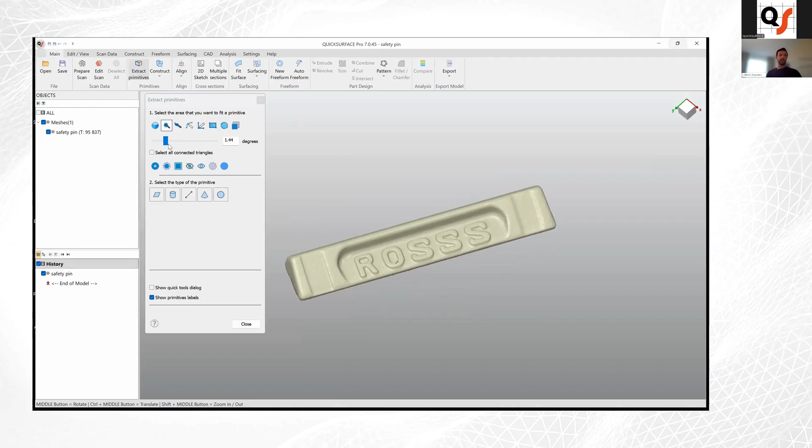We're using the segments tool, and by dragging this slider, we can change the polygon selection. I want to select the most top surface and use this as a primary plane, so I'm selecting these regions and saying I want to fit a plane.

We can take a look at the analysis. Well, this is a pretty rough part, it's casting and not a precision part. This is a safety pin for some kind of huge pallet racking system, so it's not a super precise part, and that's why we're getting these weird deviations here and there. It's not super perfect.

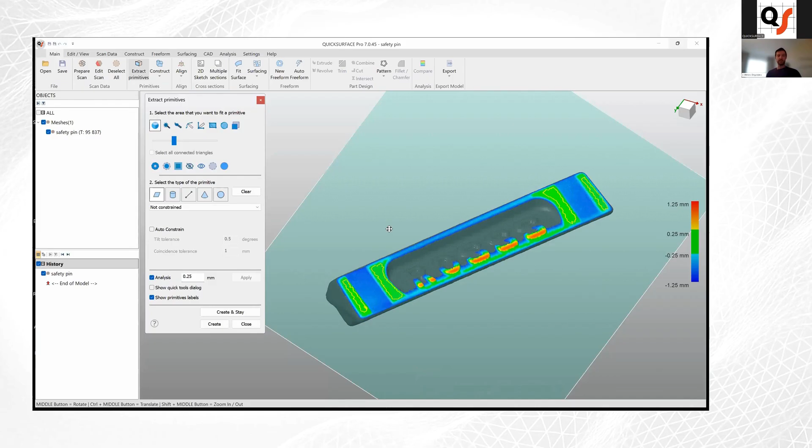I guess at this moment we can just raise the analyzer to a different deviation. Let's create our first plane, and then secondary features. I'm going to use lines from Sketch.

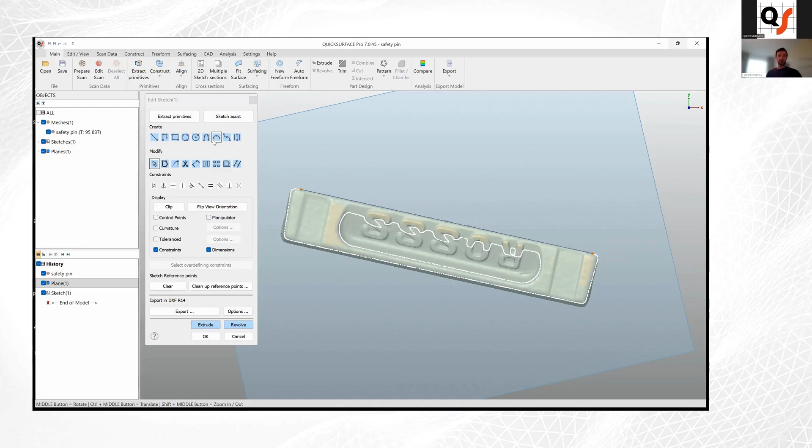In this case, I'm going to use this edge border as one of them, the front one I guess. By holding Shift, you can drag around, select these slice points, and it automatically fits your line or arc depending on what sort of point you have there.

For example, if you select this, which is obviously an arc, it will fit an arc there. So this way we can create the first line. After that, I'm going to create another line here, another line here, and from these two I'm going to extract the middle line, which will work as the x-axis.

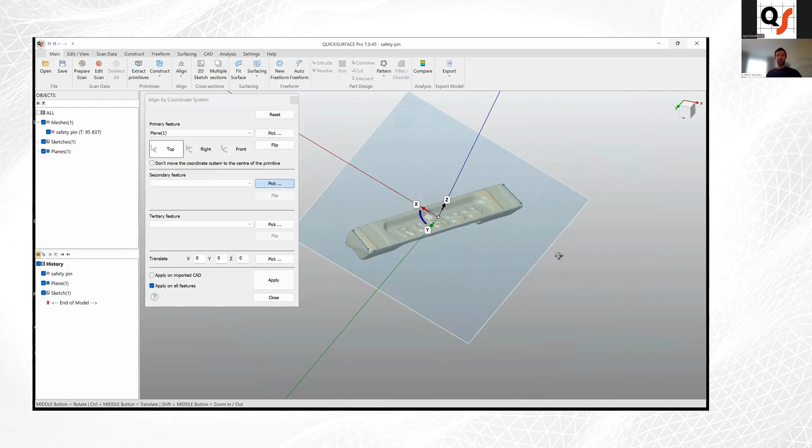Once we have several lines created, we can go to Align by Coordinate System, select the plane as the primary feature, and then I'm going to select this line, well, let's say this can be the x-axis as well, and the third line to define the center point and direction. Let's click apply. Isometric. Looks perfect.

So this is how we align such parts to the coordinate system, pretty simple and straightforward way.

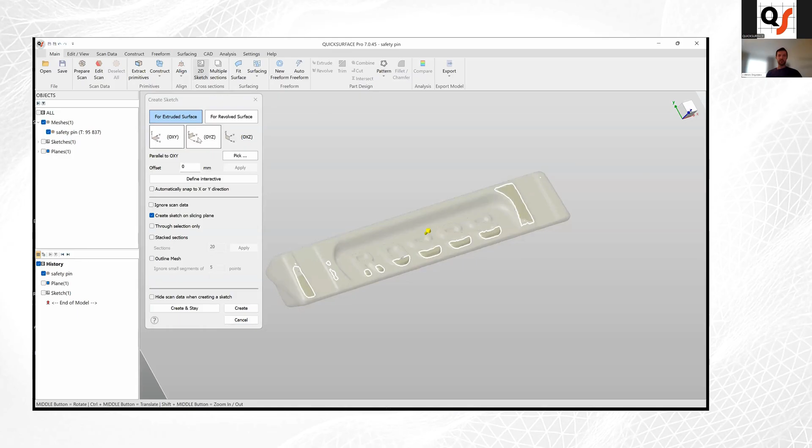After that, we can hide all of this and start extracting sketches to build our geometry. We'll go to 2D sketch. And considering this part isn't super perfect, I'm going to start with just one side of it.

During this whole reverse engineering process, I'm going to mostly stick to this side of the part, and the other side will be mirrored. So I'm going to have good deviations here, and I guess not that good on that side. So let's go.

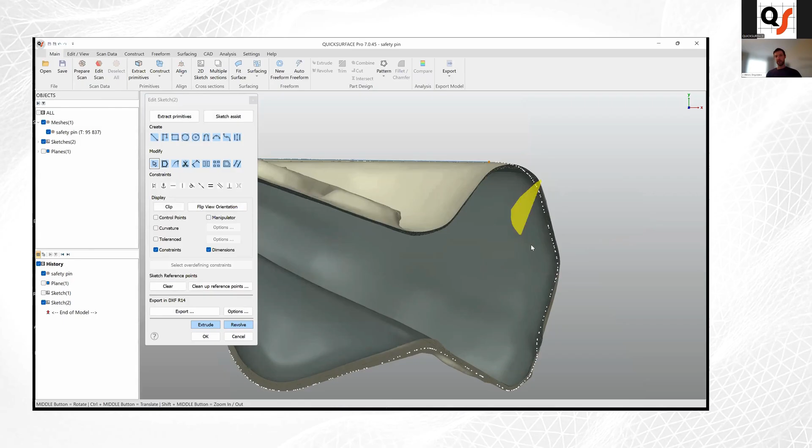Let's start with the overall outer shape. Same as previously, I'm holding Shift and selecting sketch points, now putting lines here, and here, and also like that line, and actually this one isn't that good.

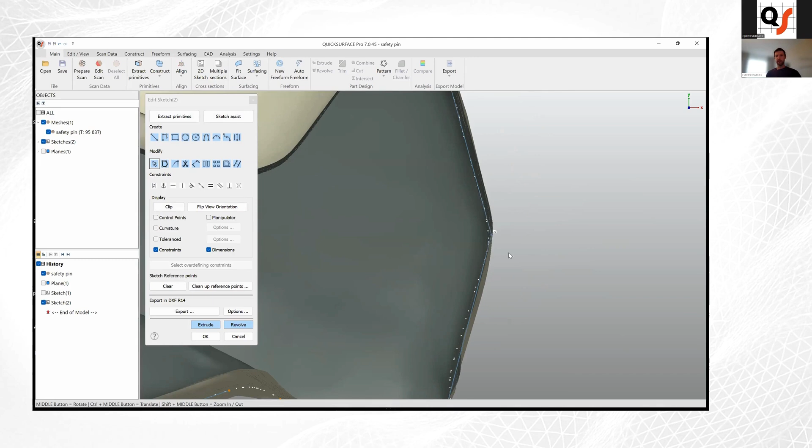So I'm going to edit manually, and by holding Control you can see a snapping icon appears. I'm going to snap to this point, and another point here. Probably I want to fit another line here. Later, by holding Control and dragging around the endpoints of our lines, the software automatically connects them.

This, like this, and the last one. Okay, so we see that it's colored right now, which means it's a fully closed shape.

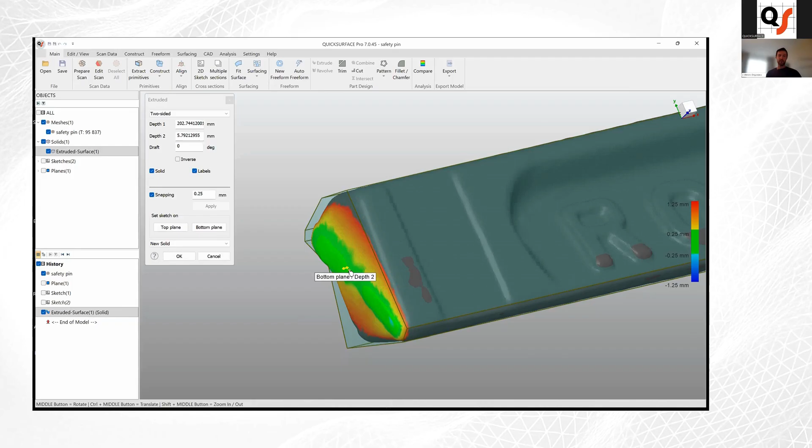So we can hit the extrude button and choose how far we want to extrude this. Typically for normal prismatic parts we use the snapping option so you can see exactly how far to extrude your solid, but in this case I'm not going to use that because we have draft surfaces here and there. So I'm just going to extend it longer than I need, and cut it away later.

Okay, so we've created the base geometry for this. We can take a look at the Analyzer. Yes, and as I said, it's not a super perfect part. As you can see here, it's matching really well, but on that side it's not that well anymore.

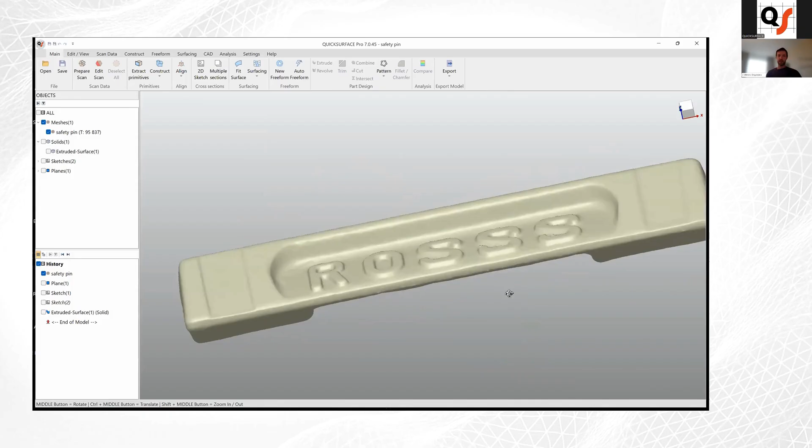And we can start to work from here. I guess in the first feature, I might, yeah, let's create this huge indent here.

Basically, we see that we have another planar surface here inside. So we're going to extract primitives again, drag our slider until we see some nice segment here that we can select. Say these, hit the plane. Okay, it will be good right now.

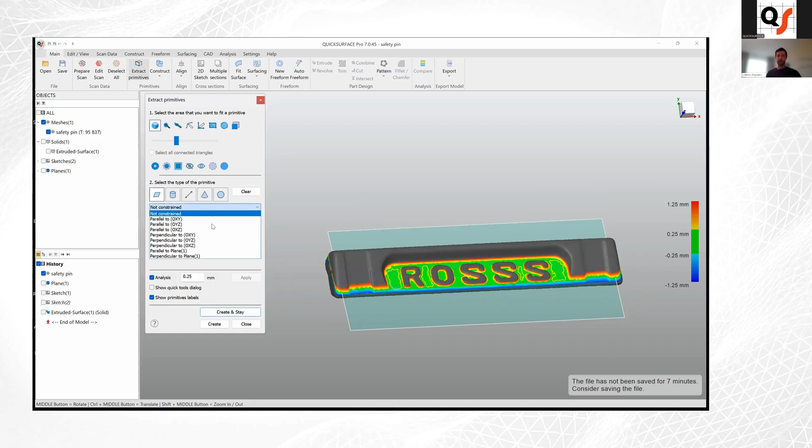But as we are creating actually like, let's say, a perfect CAD model, we want this plane to be perpendicular to the YZ plane, so it would be the same direction as the top plane we created previously. So we can come over and say we want it to be perpendicular to YZ. Okay, create. Done.

And at this point, I'm coming to create a 2D sketch. Drag it somewhere out of the fillet, for example, like this. Create. Let's get another one here.

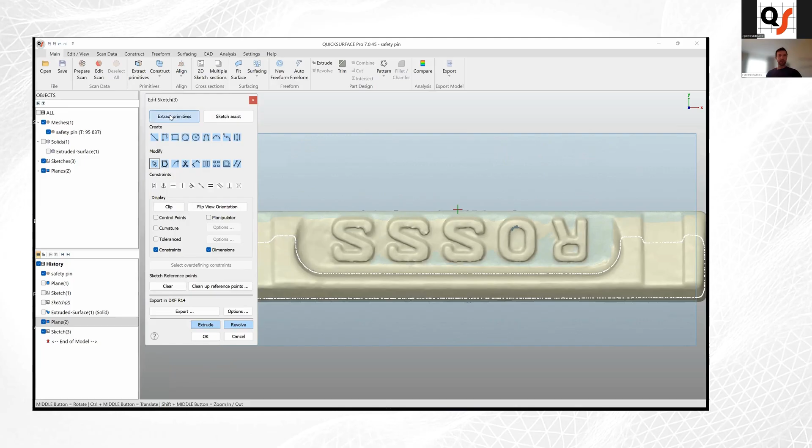Oh, well, actually, considering the geometry, we can try another approach. We can go to extract primitives. Let's select these points and say, I want to fit a slot. Not perfect, but might be a good base to start from. Make it like this.

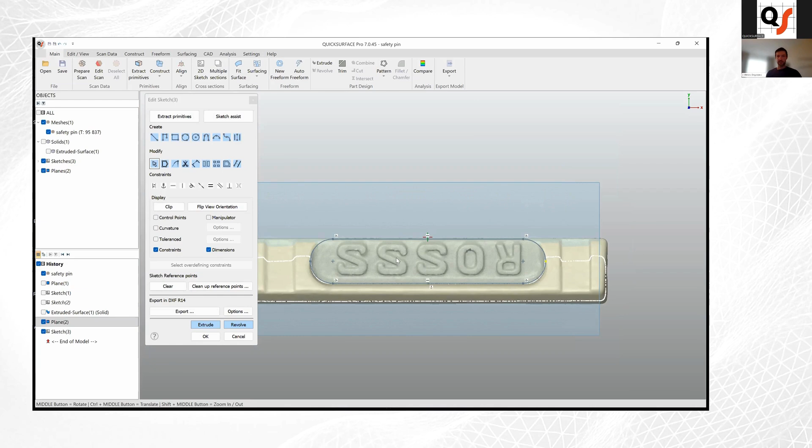Probably something like this might work pretty good. And actually, let's align it better, a bit smaller. Yeah, this looks better. So like this. And of course, we need to make it bigger to complete the cutout.

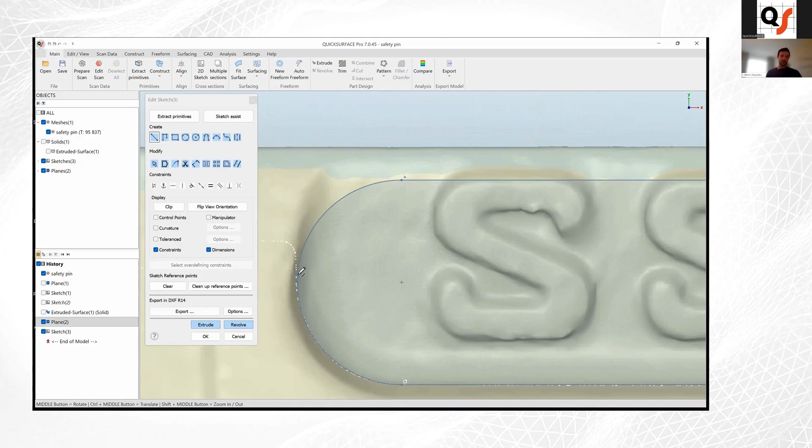So we come over to line. Now start to put it here. Let's look at the centers of our points. Let's add dimension for this. Let's say one, for example. So now we can come over to him.

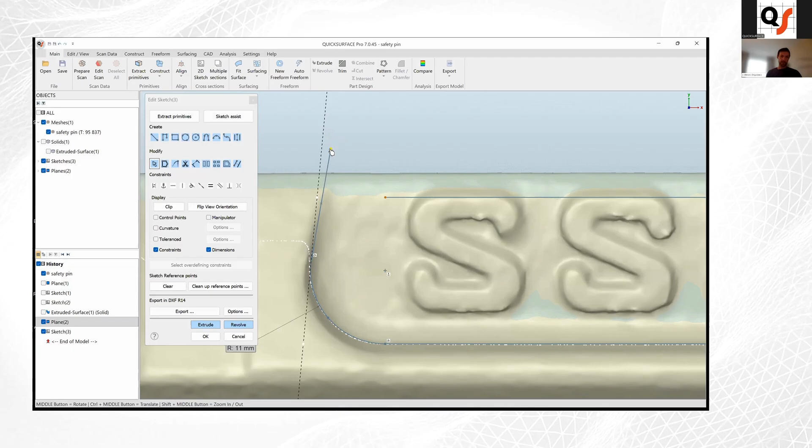And this one, at this point, we can tell this is tangent. And we can actually change some direction of it. In this case, I'm just going to eyeball this direction, and later we'll take a look at the deviation analysis, what result we actually have there.

So let's create the axis for mirroring, like this line. Let's create it there, but from the midpoint of this line. So select the mirror line, select the line that you want to mirror. Click mirror.

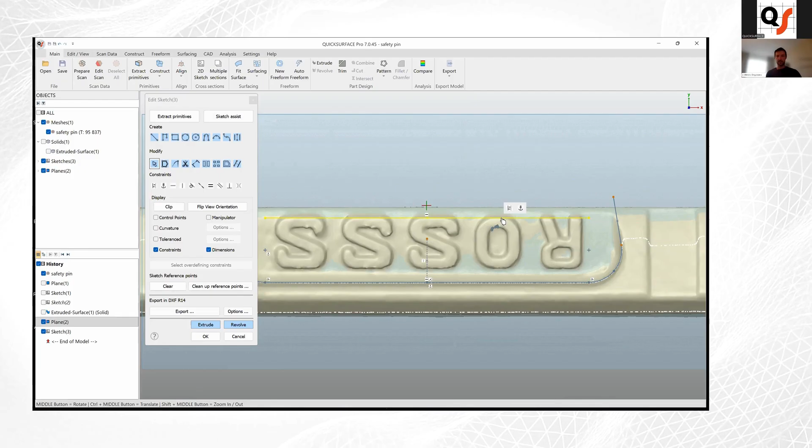Here, delete this one, we don't need that. So let's close our profile like this. Now we can see the color change, so it means it's a completely closed profile. We'll hit extrude.

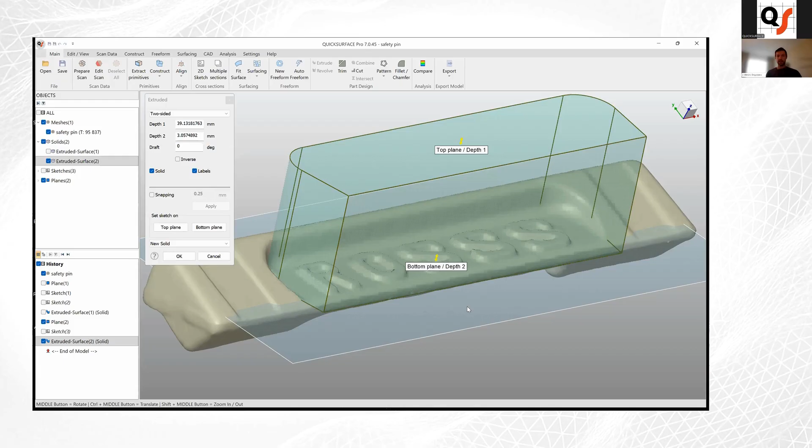Here we can actually, we have two options. We can make it a longer extrusion and later cut with this plane, or by holding Control we can snap to this plane, so you can see right now it's snapped. This will create the perfect plane that we fitted. But at this point, we see that this indent actually has some draft.

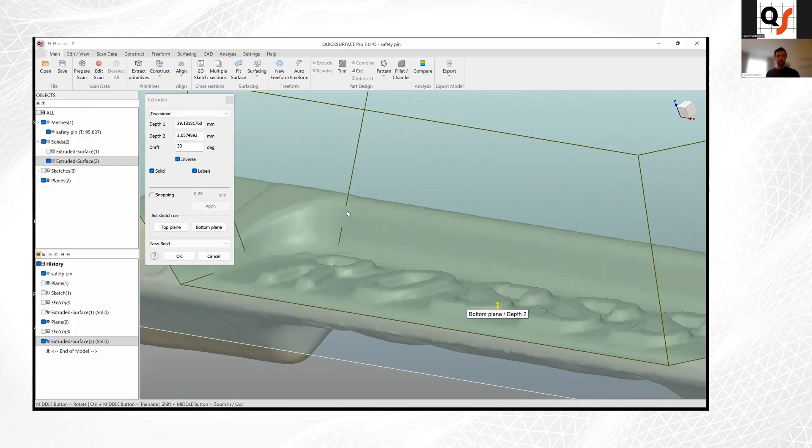Currently, we can create this as a new solid. Let's hide this plane and we can come over to compare tool and see that we actually have really good deviation in this draft surface. Same as on this side, so basically my eyeball lines were quite good.

But if they wouldn't be, you can always easily come back to your sketch, click edit, and change the direction of them to align them better.

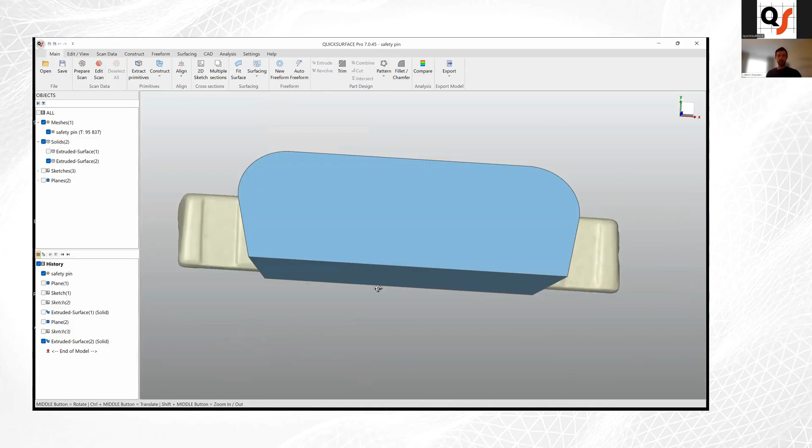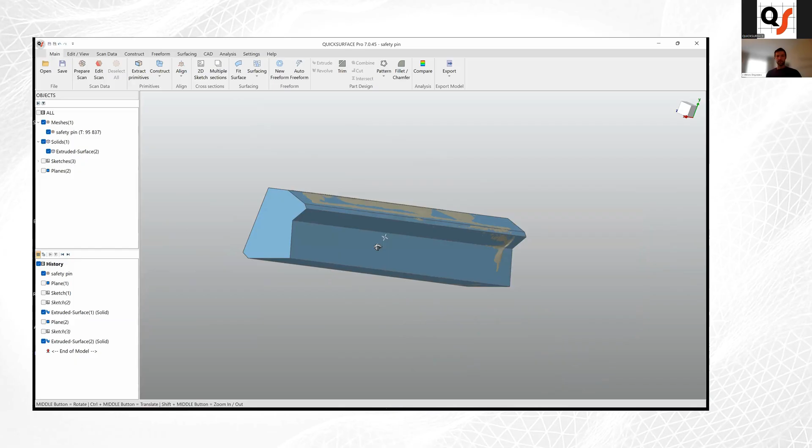So this is about this side, and probably we can add some fillets all around our part. Let's use the tolerance option. As I said, I'm going to focus on this side of the part. Looks like something 3.5 millimeters.

Okay, create and stay. Let's come over to the next one. This might be like 1.5 millimeters. Create and stay.

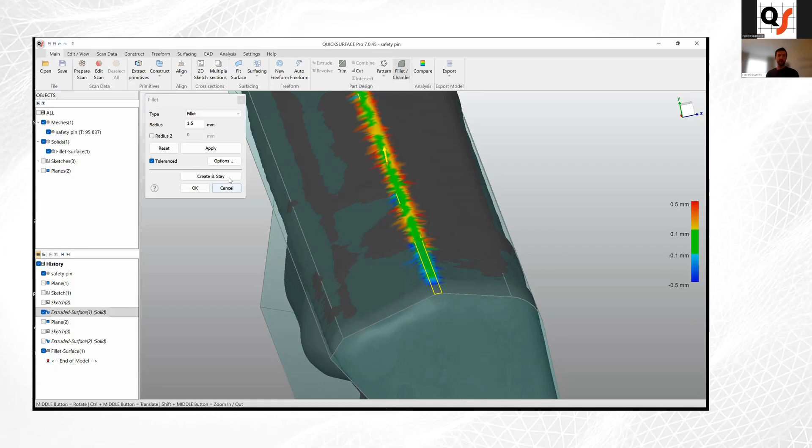Let's say this one 4.5 millimeters. So this way, one by one, you can add all your fillets with some nice deviation analysis feedback. Super simple and cool way, because you don't have to make your fillet and go to the compare tool and see if you've actually nailed it or not. So you see this instantly.

And one more here. Looks like something around 1 millimeter.

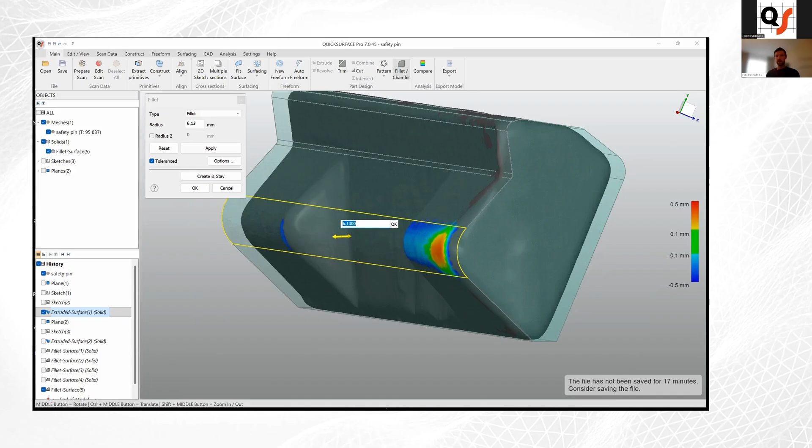Six. The next one. Two. The last one. 3.5.

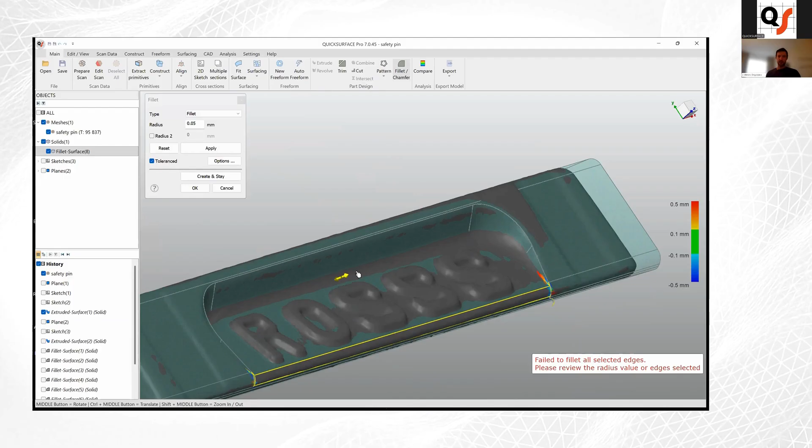Okay, so we have created fillets for the main body. After that, we can probably create these fillets right now. Hopefully, like this, and let's get rid of the very last one. Let's start to fillet on this side.

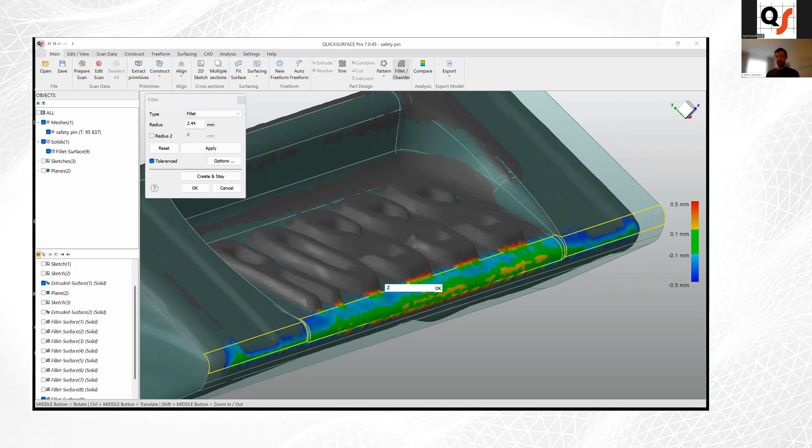And at this moment, we need to create this cutout right here. So let's create another sketch.

As you can see, the surface is pretty uneven. So let's try to find something. Maybe this position looks quite good to me. So let's create it there. Let's enable clipping.

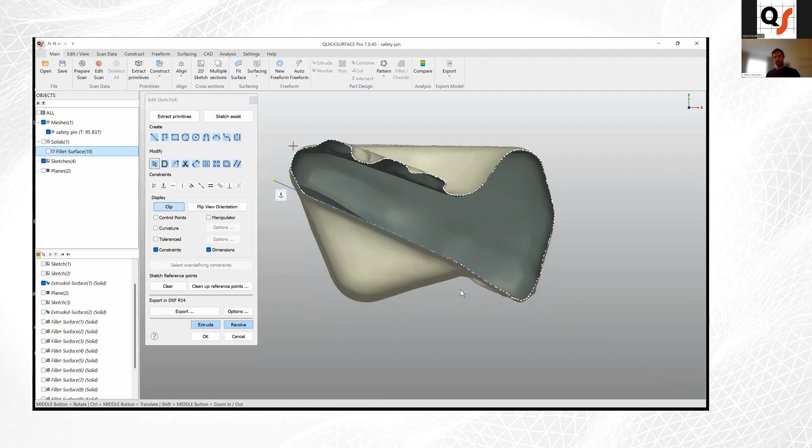Again, selecting the polygons, not polygons, but slice points. And on this side, actually have to align this edge to the actual edge of our solid, which is this one. Let's add a line over here, and then holding control, let's connect them.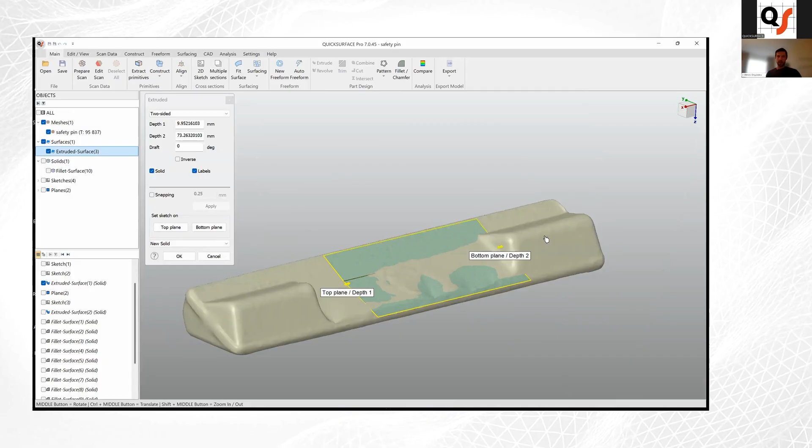Something like this. Yes, hit extrude. Make it longer.

Actually, it might be easier for us to create this as a cutting tool. So let's go back to our sketch. Let's make a complete profile out of it. Something like this.

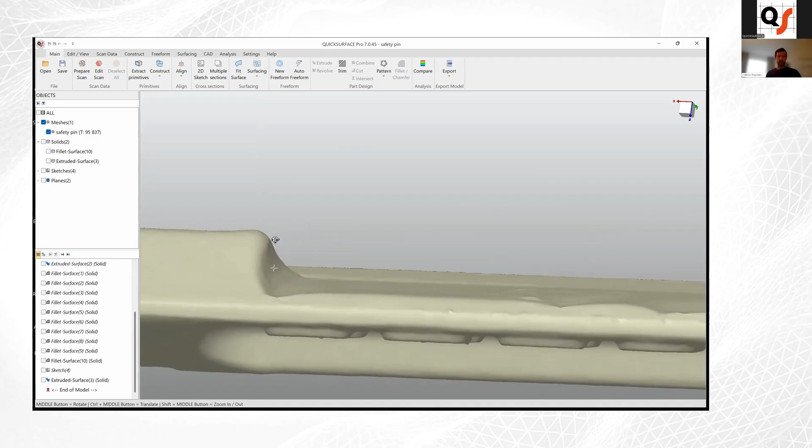Okay, now we can hide this one. And we need to create these separate surfaces. And these surfaces are again drafted. So we have several options.

We can hide the cutting part and obviously use this face to create a sketch, this way.

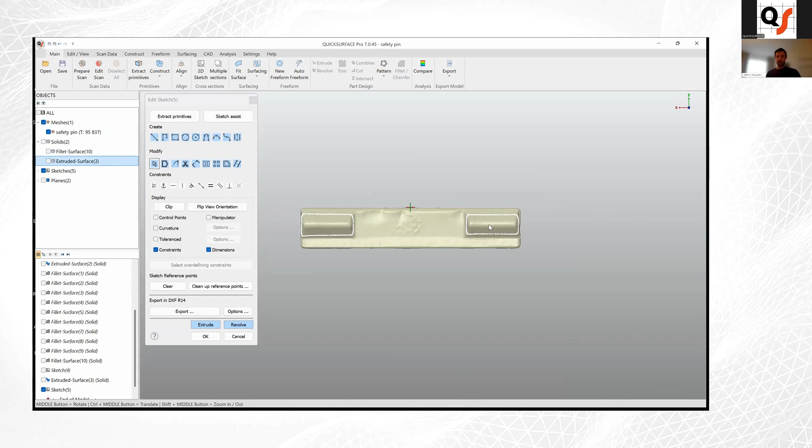Yeah, let's take a look at them both ways. So disable clipping, flip the orientation, add the body, and then focus on this side. So let's put some line here, extend it.

Yeah, let's extrude it. So as you can see, we have draft here, but if you have just one straight line, you won't be able to set draft. So you see the error message. Because for software, it's extremely difficult to define some direction for a simple line.

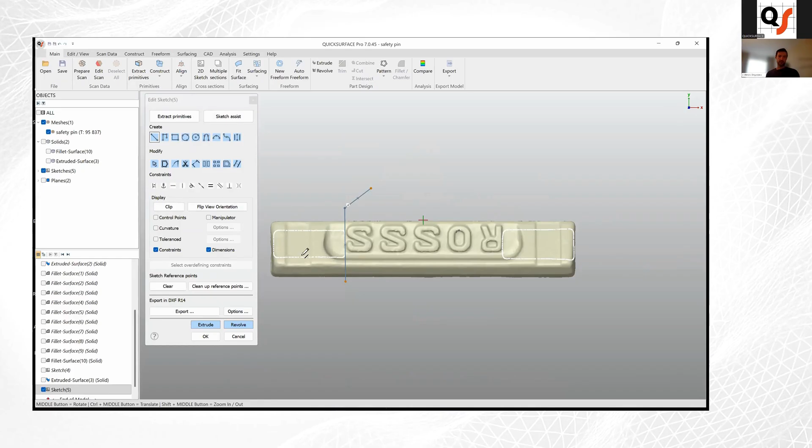So what we can do here is come back to the sketch, add another line at some angle, have the sketch like this, click extrude it again, and now we can actually draft it.

Okay, so 15 degrees looks like a pretty good draft for this surface here.

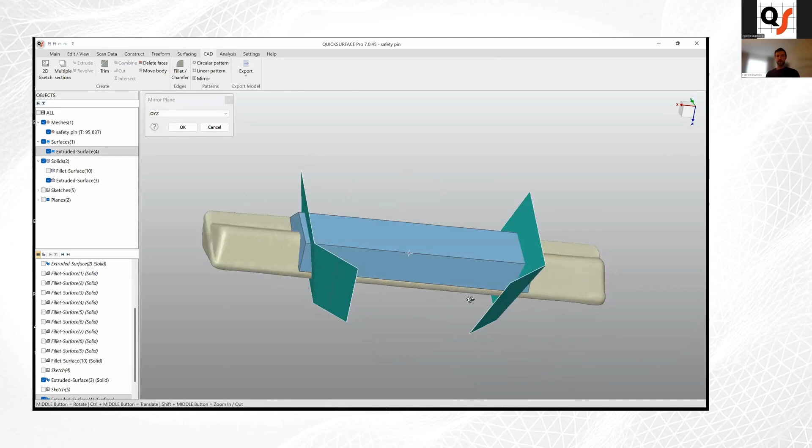After that, we can unhide the solid that we're going to use as a cutting tool. Select this extruded surface, come over to the CAD tab, use the mirror function. Okay, accept this.

Now we can hide our mesh, select all these entities, features, and trim them. Give it solid body.

And at this point, we can take a look at what's happening with our deviation. We can see on this side it's good. On the other side, as always, it's not that great. But as we're sticking to one side, it's fine.

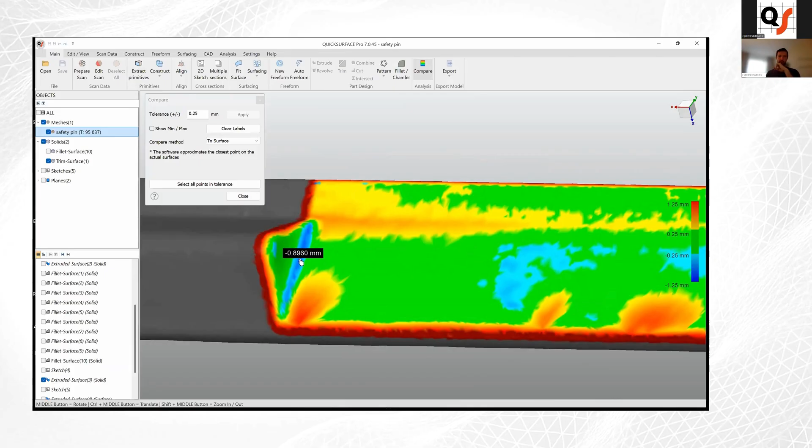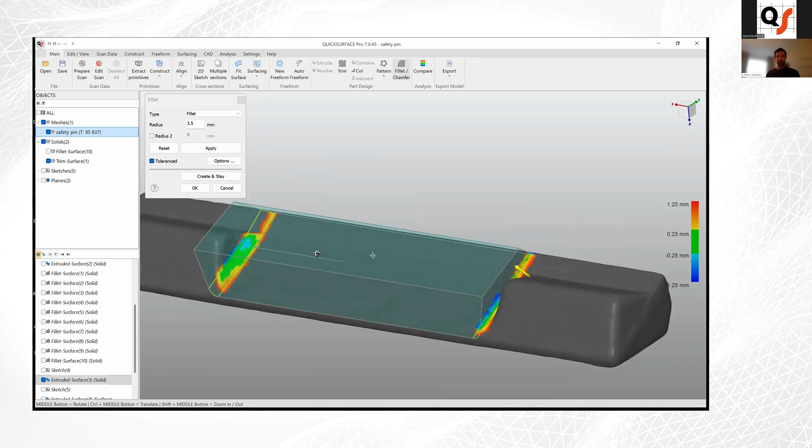We can align this. And train our cutting tool looks really good to me. Accept this one. Okay, so our cutting tool now got fillets.

Now we can unhide our main body. Now come over, select it. We use the cut from solid to solid function. Oh, it doesn't work this way.

Okay, we have some sort of error here. So let's try to get rid of this.

We have two options: try to reduce our fillet, or we could go actually to the sketch of this body, and let's change, let's say, the angle of it closer to 90 degrees.

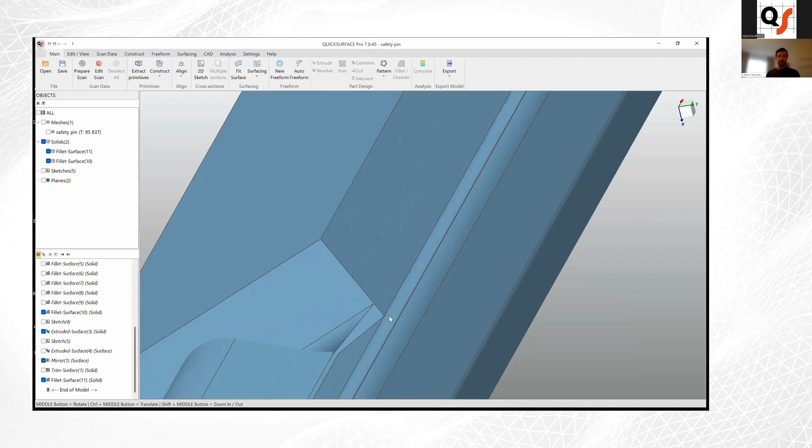And let's do it from here. Now let's try and create this once again.

Okay, this looks good right now. Let's try again.

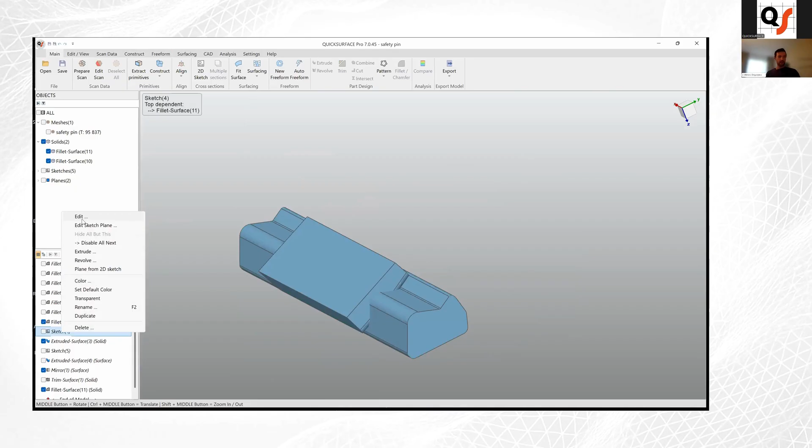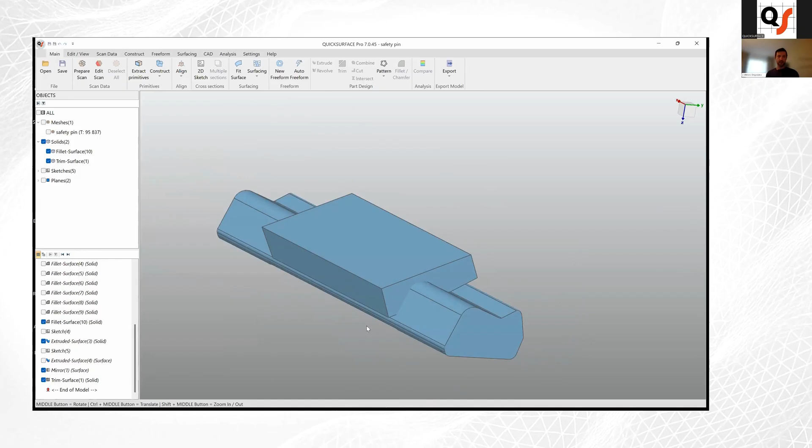So we can go sketch up our trimming surfaces and let's just bend them like this. Okay, and then let's try again with our fillets.

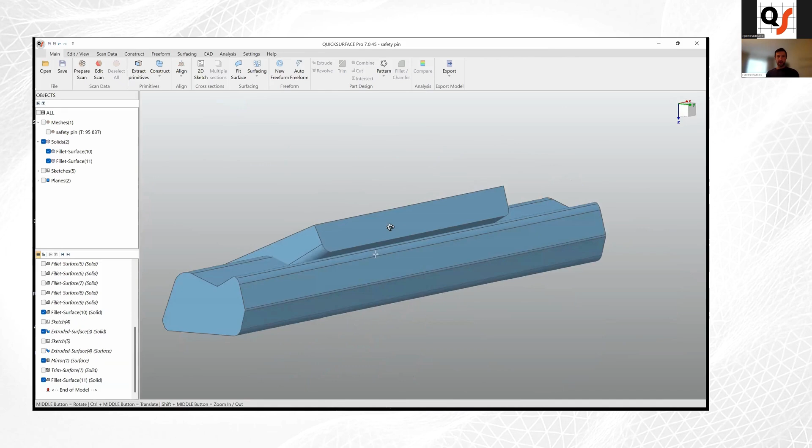Oh, hi. So, okay. Let's try some different approach now. I just have this one. Okay, catch again.

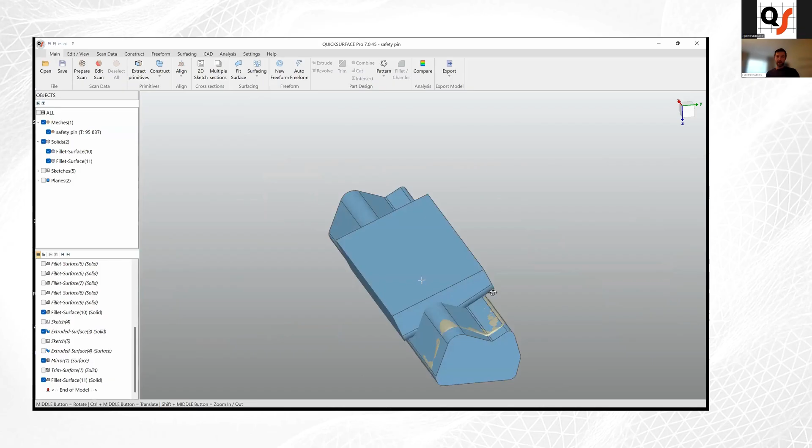Oh, actually, let's skip this. Delete the fillet from this. Get rid of the trimming, this cutting, this sketch as well.

So let's try to fit the primitive here and see if this changes something or not in our life. So just as an experiment,

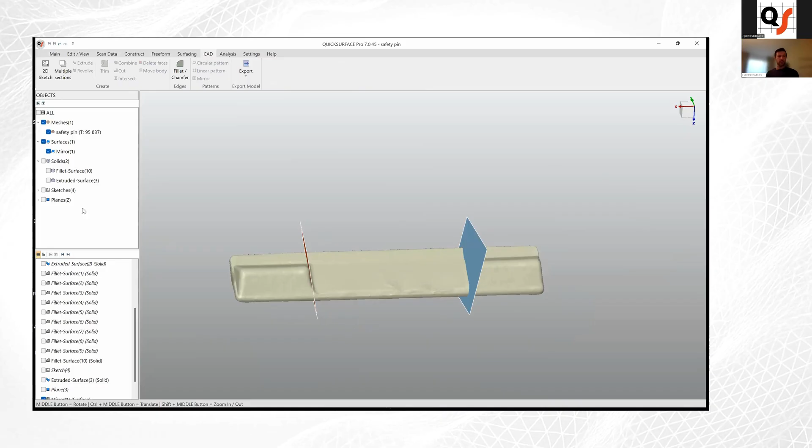let's mirror this thing, this way. Let's see if this works. Okay, now this side works.

Let's try to add fillet again. Now, okay, ta-da. Okay, this worked.

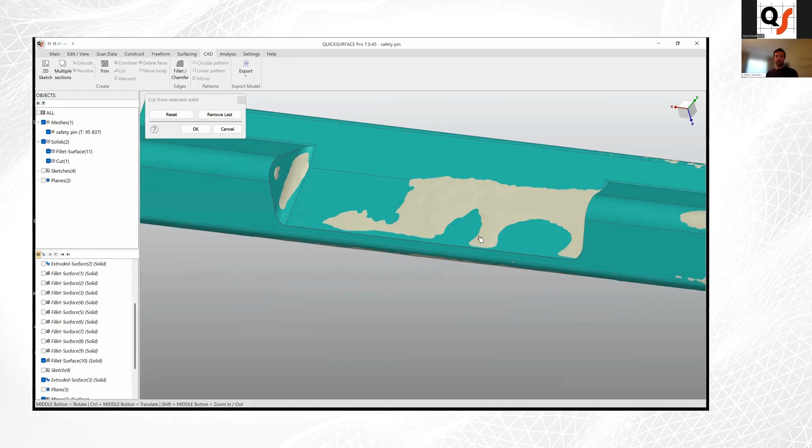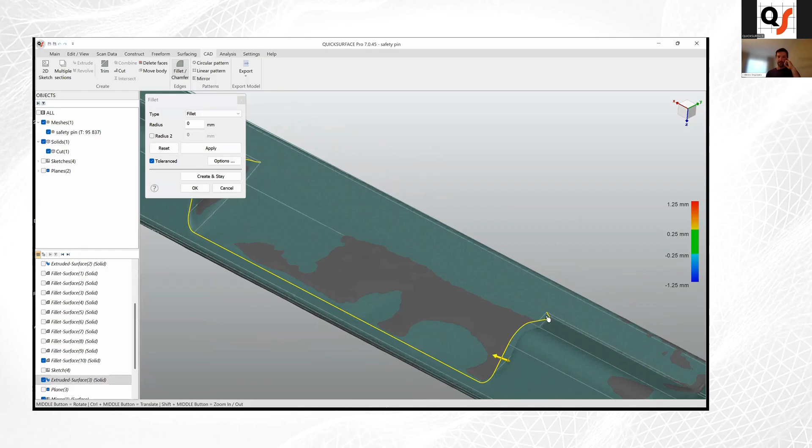So we have created this big indent here. After that, we can come over and probably fillet here. But this fillet guarantee will have some limitations considering we have a sharp corner there. So let's just try and see what we can get here.

Failed to create bigger fillet. So in this case, I think I will leave this one for now, and we'll come back if we have more time left for this.

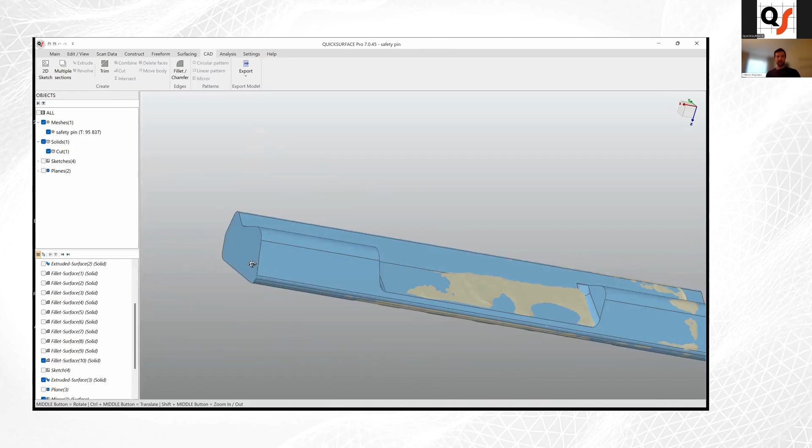There is a solution for this, but I want to show you how to actually complete the end parts of this part, so it's more or less finished. Coming to the left side, come over to main tab, extract primitives, and I'm going to just go with fitting planes here.

Create that one as well. We can come over, rotate them a bit so it's easier to understand how they're forming.

Let's extend these planes so they're larger than our solid, and we have good intersection of two of them. So select both of these planes, let's go and trim them. We get a single surface, okay.

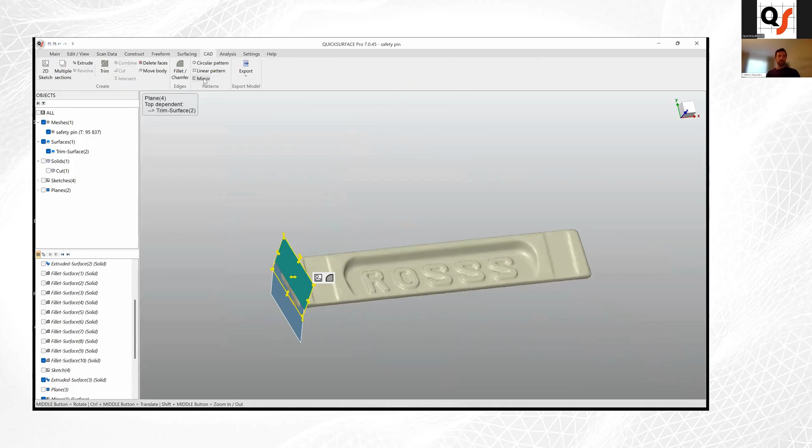And again, we're going to actually mirror this to the other side. Bring back our main body, select all of this, trim. That way one side, another side, we get the solid body. Perfect, okay.

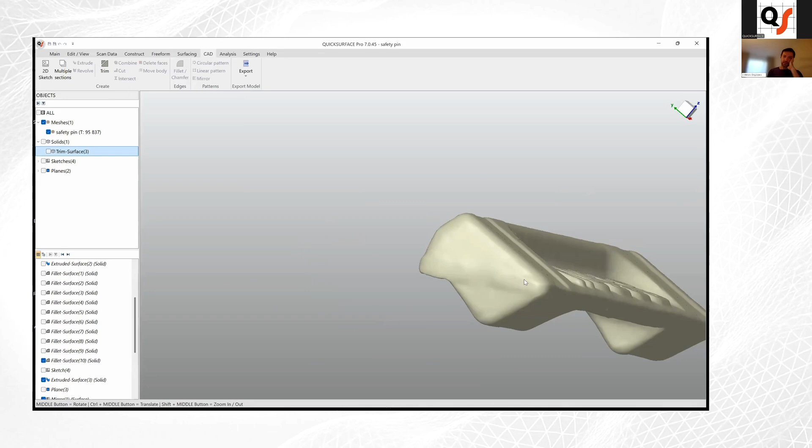And now we can come over and add some of these last fillets on this side. This one I will create randomly because, as you can see, this part is a casted part, and the tooling was from two parts, and here we have a casting mold connection line that was grinded somehow. You can see it's poking out of the surface quite a lot.

But this time I guess we're not going to reverse this sort of defect, which wasn't completely finished in the production of this part. So we're just going to create this more or less as it would be a perfect part, which means I'm just going to add some random value to this fillet because I have nothing to align to.

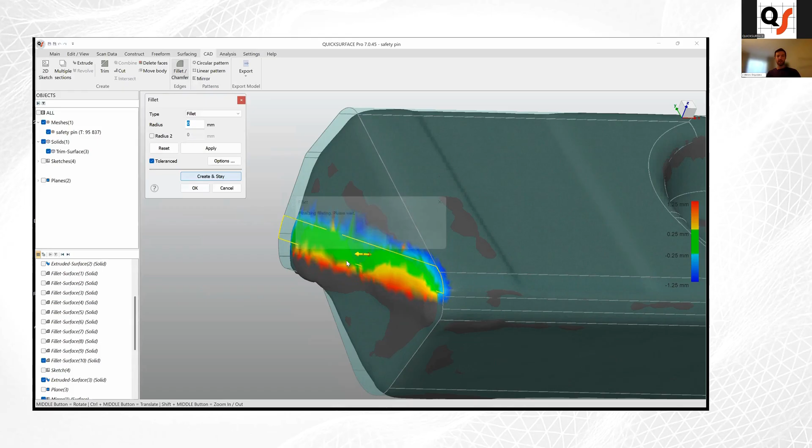Let's keep it like 3 millimeters, create and stay, and we can select this complete edge and this complete edge. Currently, due to some small sharp corner, it only allows us to create 1.5 millimeters.

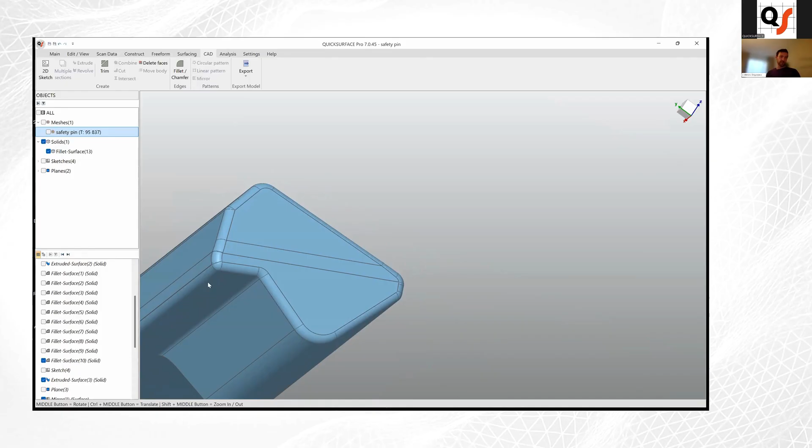Click OK, let's take a look where the actual issue might be. Typically these fillets may fail, most likely because of this small sharp corner, because it will start to create some weird geometry. If I wanted to eliminate that, we would have to change this fillet probably, but during this session I'm not going to do that. In this case, this will work as a good example.

And we have the last two indents left here. At this point we have several options again. Let's do this, let's fit another plane here, say it's perpendicular to YZ. Okay, create.

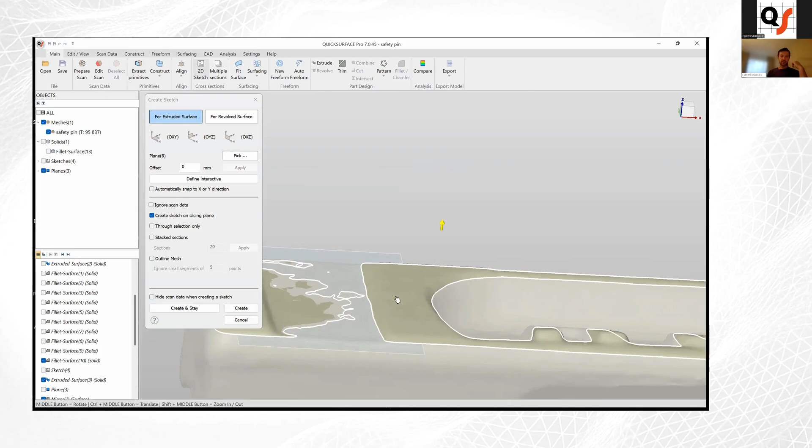Let's use this plane to create a profile for our cutting tool. This scan surface is pretty rough here, so we'll just imagine this cut ourselves this time. Let's do two lines, one on the top, one on the bottom, and use Control and drag around the endpoints of the line to connect them quickly, like this.

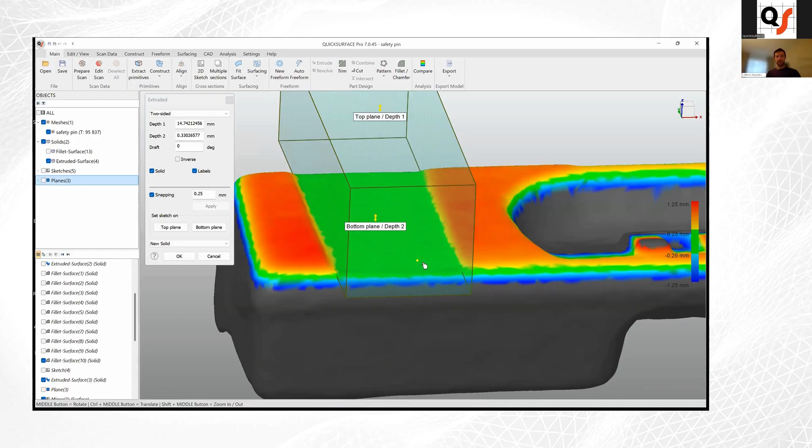Let's extrude this. Here we can actually disable that plane and use the snapping function, so we can see where we want to snap it. Here it looks really good.

At this point, now we'll disable snapping because again we have to create some draft here. Let's go with probably 45, actually 45 might be pretty close here. Let's click OK, take a look and compare to it. Oh, a smaller, tiny bit away.

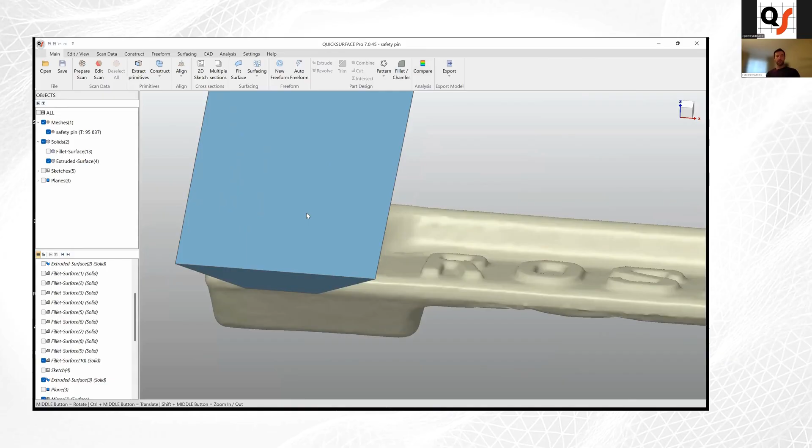We can come over to this extrude and change it, let's say to 50 degrees. Probably we have to go with... let's say it's 40. We're getting closer, but it should be good enough for this kind of part.

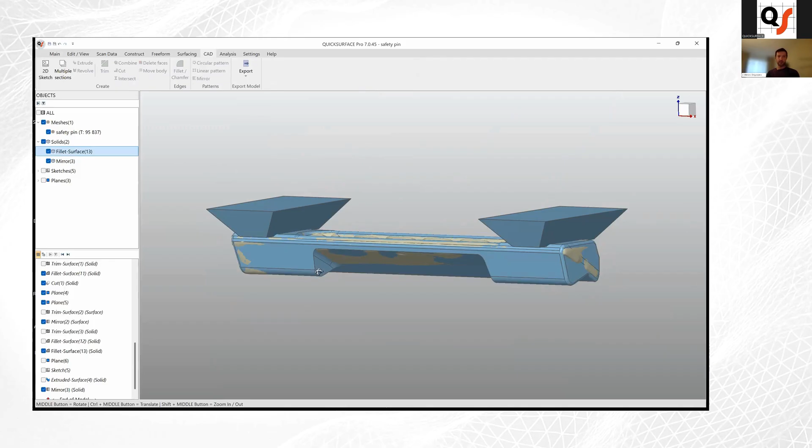So select the solid to CAD tab, mirror. Okay, bring back our main body, select that, cut from selected solid, select our cutting solid. And we have created these fillet indents.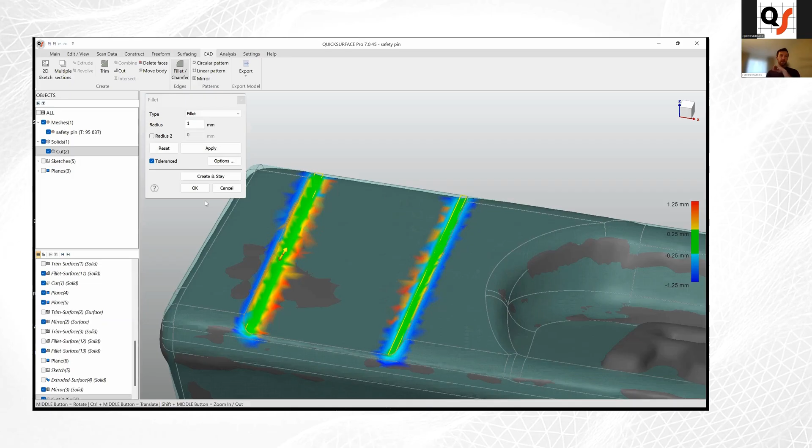So let's slap some fillets over them. Let's say it'll be a 1 millimeter fillet, create and stay. Let's select the boundary, this one as well, and let's say it's going to be a 1 millimeter fillet on this side as well.

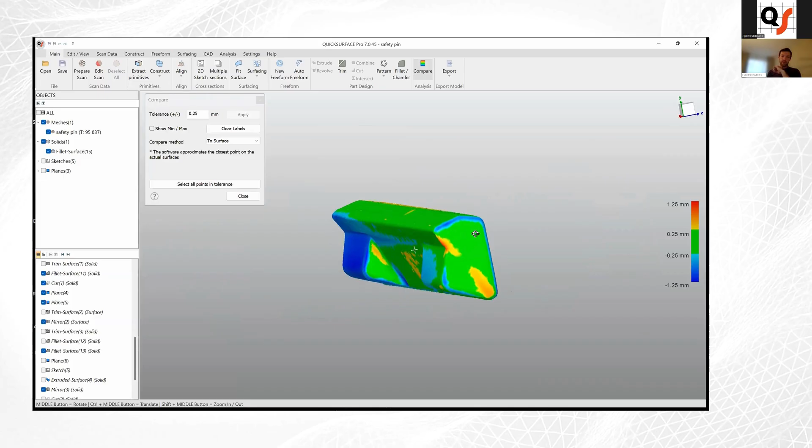So this way we have reverse engineered this part, more or less. The compare tool shows not that bad deviation in most parts, and as I said previously, this is a super rough part, not a precision part, and in this case it's an absolutely acceptable deviation.

Costa, what do we have with questions at the moment? To be honest, there are not many questions, which is good and bad in a way, but this is because you are doing really well with the presentation. Most of the questions are asking whether this will be available later to be seen on YouTube.

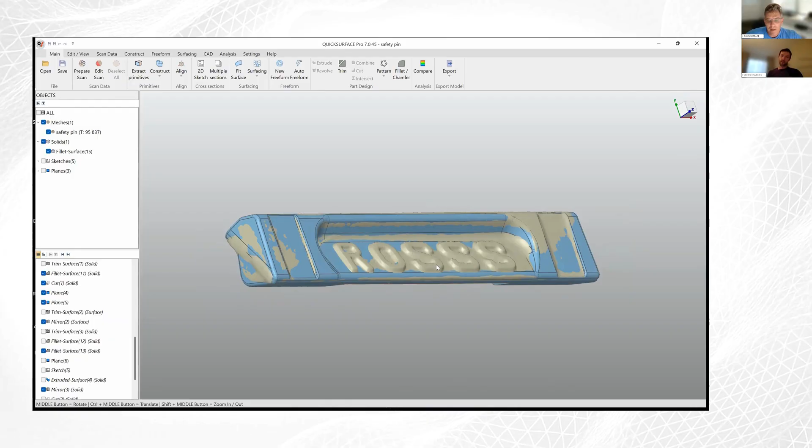What I really liked about the presentation is that you show the steps. To repeat to the audience, the main idea is there's one major fundamental step: first is alignment. What Viktors showed is you need to align your object before you start your reverse engineering. This is really important. The next one is nothing is super complicated, you just take the pieces one by one, and this is how you end up your job. In the beginning everything looks frustrating, but thanks to these step-by-step tutorials you can learn how to approach it. You probably create a big volume and then start chopping out of this, which is what Victor showed today, and then finally you just finalize your object.

What else I would like to point out is our ability for this online deviation analyzer. This is really cool, because it gives you the ability to decide what you want to do and how accurate. As Victor showed, do you really need to reproduce the problems of the object? No, you always need to think what is your goal, how you want to achieve what's useful, and what you need to do for manufacturing. Whichever scanner you take, it will never be perfect, and this is normal. This is how you just need to do it.

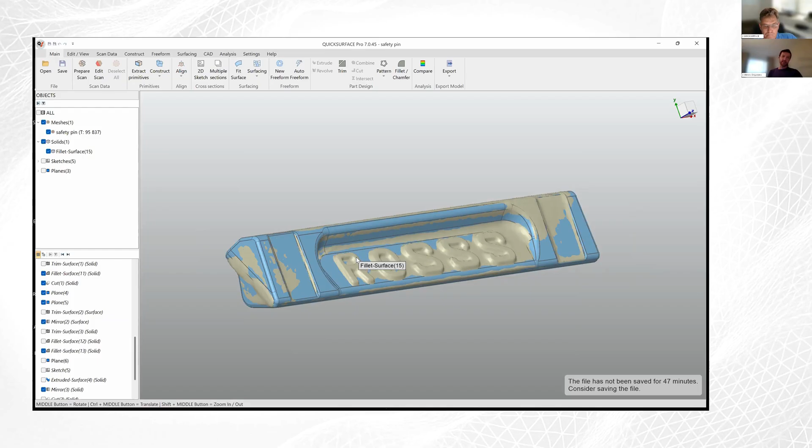So another question is, after finishing the object, it has the scanner measurements. If you need to refine these measurements, what do you do? This is exactly what we show - it's a parametric modeler, so on the left side you can see the feature tree. You can go and edit a sketch, or change the dimensions, and then it will recreate the object the way it's been by design, not by the scanner. So basically, if we have some good reference dimensions - for example, you know exactly what angle should be here - then you can come over and change this angle, or do this while you are creating these sketches.

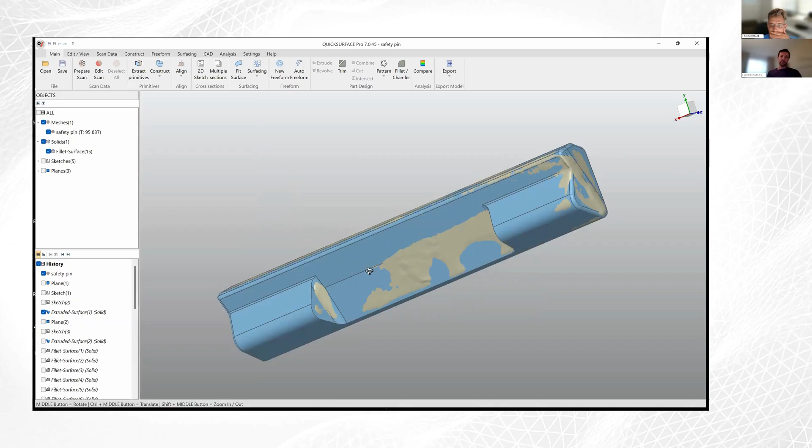If you set this to like 70 degrees or something, for example this horizontal line, you can see it deviates from our mesh. It will start recalculating, but if there are insufficient cutting planes, it will result in some errors. In this case it worked out, but previously with the cutting tool, when my extruded surfaces weren't long enough, it wasn't able to retrim the modified sketch that was extruded. So you have quite a lot of flexibility, you just have to understand what you need and what measurements.

Pretty often I've seen comments in some groups that people can't import the correct scale of their parts, and they ask how they can rescale the scan data because it came out from their scanning software in wrong dimensions. I haven't typically met such conditions, but if you want to rescale your scan data, you can always do that. In the scan data tab, you have a scale function for your scans, so this can be achieved pretty easily, but it depends on the case.

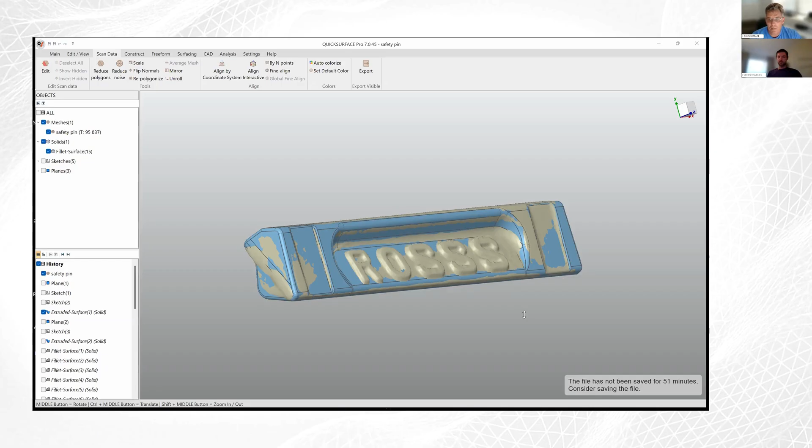Now we have a question. Since you said we are using a SolidWorks extension - no, we are not using a SolidWorks extension. We have a plugin that works inside SolidWorks, which extends its capabilities. When you install our plugin inside SolidWorks, it allows SolidWorks to load a huge amount of meshes, something between 60 to 100 million triangles. Our plugin allows SolidWorks to use the scan data, so you can design around the scan data and achieve your goal. That's the difference.

Do I have to purchase this plugin for SolidWorks? If you visit quicksurface.com, you'll find our offerings. We have a standalone application, and then we have the plugin for SolidWorks. There are a lot of videos about how this plugin works, but if you need additional information, contact us and we're happy to set up a personal demonstration for you.

I hope this answers your questions about the plugin in SolidWorks. One thing to notice is the plugin isn't the same as the standalone software. In standalone software, we have much more specially designed tools to work with meshes. In SolidWorks, yes, you have some kind of similar tools - you can create new freeforms, fit surfaces, make sketches according to slices of your mesh, fit primitives and things like that. But you'll notice there's a smaller amount of these special tools than we have here. Still, it depends what you're working on.

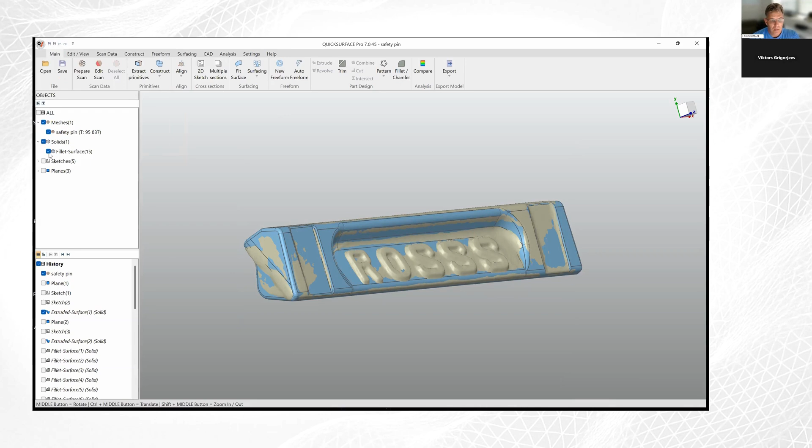When you run the auto freeform, are there any guidelines to follow, like amount of mesh, holes removed? Yes. When you do auto freeform, Victor, can you just hide the cut model? And this is the part. What happens is people get lazy and just do the auto freeform.

So in this case, you probably want the highest possible setting, put it to fine, then feature details set to highest, and press go to see what happens. This is the auto freeform, an amazing tool that takes a couple of seconds. We're really proud of this, but if you press OK now, this is what you get.

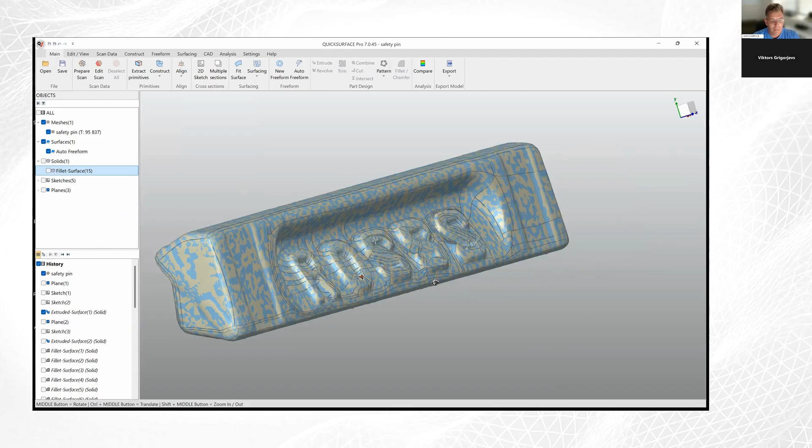So what are the limitations and what can you do with this? How auto freeform works is it just wraps around the surface. If you hide the mesh, people can see this is what you get, and it's a CAD model. So then people may ask why Viktors spends so much time demonstrating cut and trim and so on. Well, because what you see on the screen is useless in terms of geometry, because it just wraps the mesh around and it's a step.

But still, this is not good enough for you. It's not parametric, it's not a perfect plane, it captures all the imperfections of the scanner. You can imagine if you're in a kitchen and you take a kitchen foil and wrap it around the object, this is what you get. Although it has amazing applications, which you can see in our other workshops or videos, it can be used for freeforms when you have castings or organic shapes.

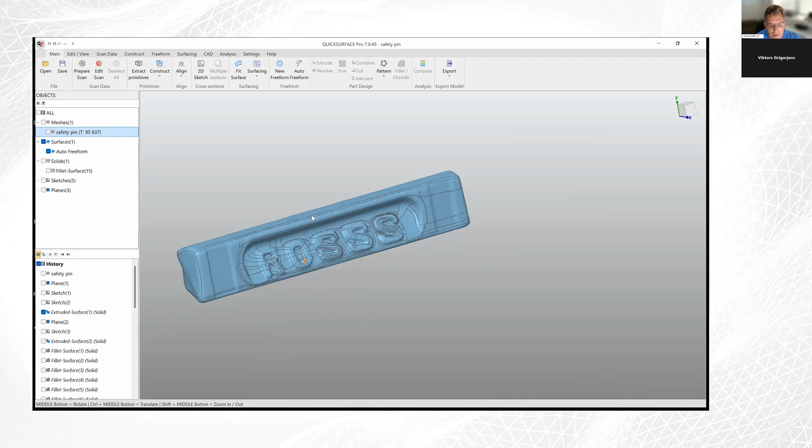We don't recommend using this method on objects like this one, because for the next step, I really don't know what you can do. You don't have any control on the fillets, the fillets are just not good enough. So you can give it a try. This is what you get from auto freeform.

So yes, it's a step file, but is it useful? It's really in your hands. If it works for your application, then it's fine.

I hope this answers your questions, but if you have more about automatic surfacing, let us know and we'll be happy to answer. Yeah, one more thing.

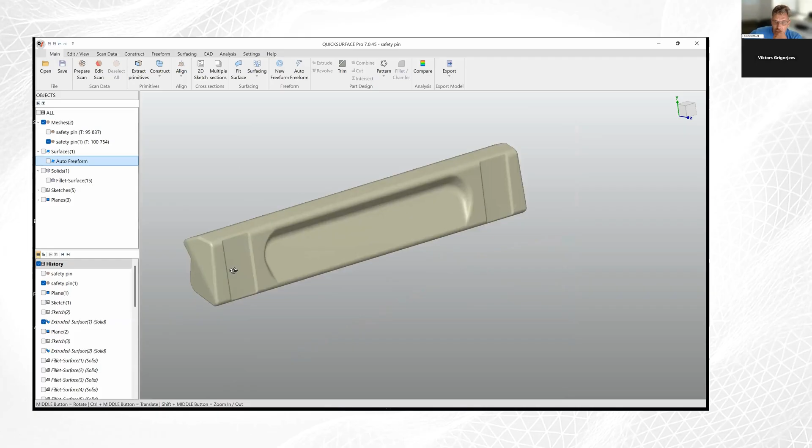So here is our reverse engineered part that I saved as STL, exported it, and then brought it back as scan data. At this moment, let's just move it and see the actual difference. So the same would go to auto freeform. In one case, you get all the imperfections of scan data, all these ripples and everything, all the noise and all the defects. On the other side, you get an absolutely clean part with nice planar surfaces and everything.

So this is up to you. For what are you going to use this? Of course, you can use this auto freeform if you just need to roughly copy some part and don't really care about the surface quality. You just need something approximate that would work, as some cover for something, and you don't care about surface quality, then you can do this. But for manufacturing purposes, or if you want to do this as a reverse engineering job for somebody, these people won't be happy with this result.

We get quite a lot of emails where people ask, what can I do to improve it? How can I change the fillet here or there? Or how can I get the crisp corners? Well, you can't, just because it's wrapping around the scan data, and that's all what it does. So it's not a great approach for reverse engineering prismatic parts or more precise parts.